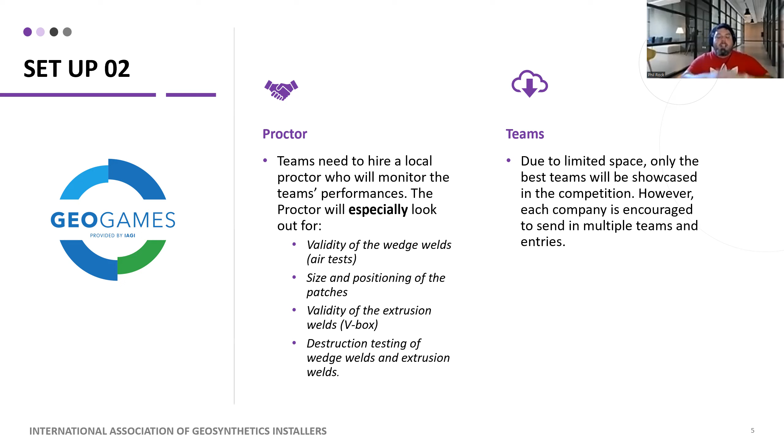So here is what you will have to weld. All players must be wearing proper PPE; a little more detail on this a little later. Prior to the start of wedge welding, the teams position their panels exactly as shown in the panel layout drawing that you see right there. They calibrate their machines, leave them on, and position them where they want inside the layout. So you calibrate your machine, you tweak everything, you put it in the layout.

At this time, teams are allowed to cut out the patches that will be required for the repairs as well. So you look at that layout, you pre-cut your patch, and you leave this on the layout. The timer hasn't started yet. You can see right there what we require for filming. So basically, we need the camera placed as shown in the drawing below.

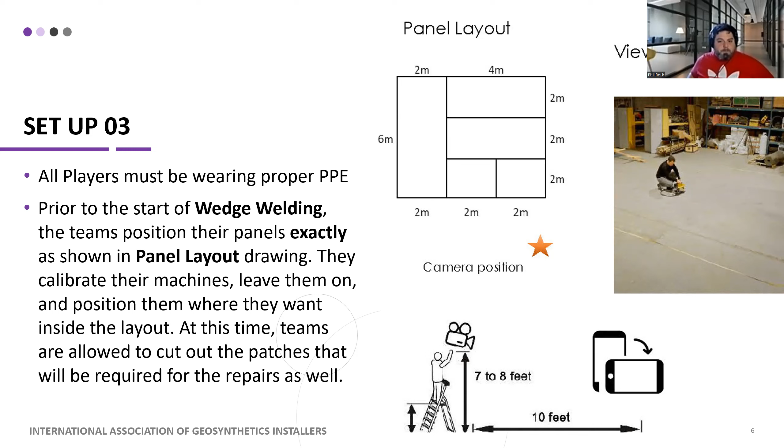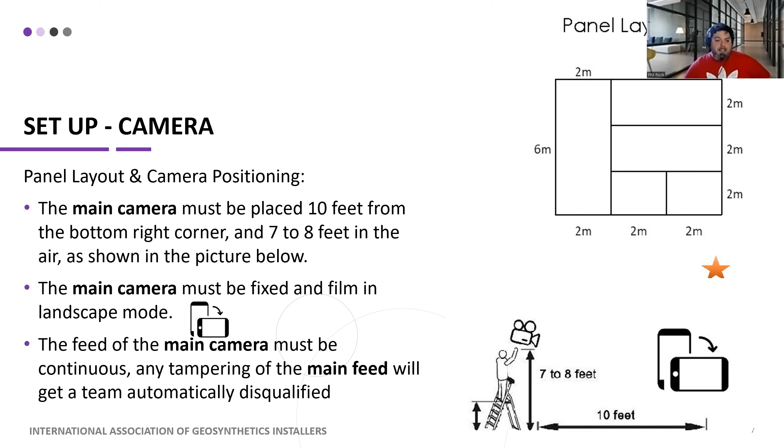The main camera must be placed 10 feet from the bottom right corner and 7 to 8 feet in the air as shown in the picture below. You can use your phone. The main camera must be fixed and film in landscape mode, and the feed of the main camera must be continuous. Any tampering of the main feed will get a team automatically disqualified.

Once ready, the players need to wait outside of the layout just beside the camera. The Proctor counts down 3, 2, 1 before the team can enter the layout, then starts the stopwatch once the team enters. Everything is prepared beforehand - patches are pre-cut, machines are calibrated. The team is outside the layout, the Proctor counts 3, 2, 1, boom, and the timer starts. The competition starts.

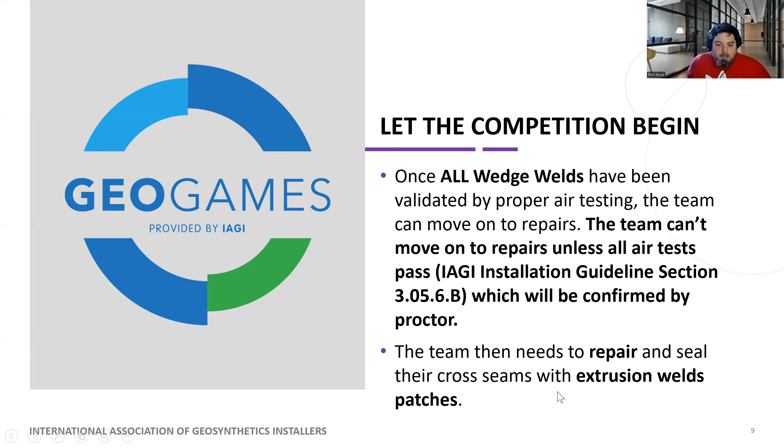Let the competition begin. Once all wedge welds have been validated by proper air testing, the team can move on to repairs. The team can't move on to repairs unless all air tests pass, which will be confirmed by the Proctor - this is very important. You cannot move on to repairs at all until all your air tests have been validated by the Proctor. A simple oral confirmation with the Proctor is sufficient - just make sure, like on the job site, you say 'Proctor, hey, 5 minutes' and then you take out your clamp. The team then needs to repair and seal their cross seams with extrusion weld patches.

Once all repairs have been achieved, the team needs to leave the layout. The Proctor then stops the chrono and conducts V-box testing on repairs and applies applicable penalties.

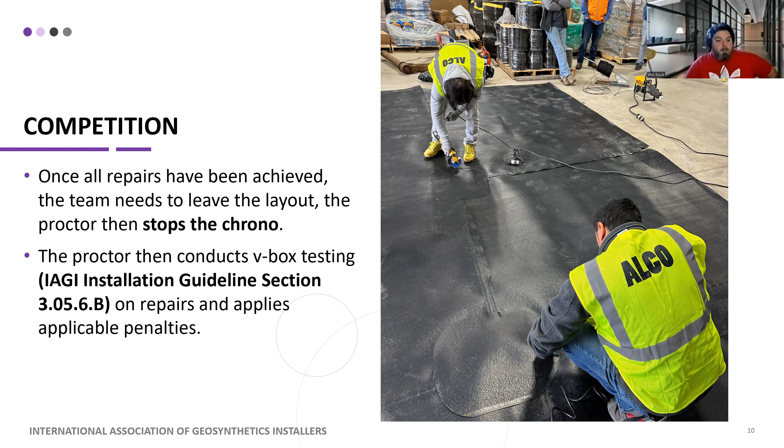Let's go into details. Any DT failure will result in automatic disqualification. After the chrono has been stopped, the Proctor will conduct DT testing on the wedge weld and one extrusion weld. If you fail any DT, you will be disqualified. Other than that, the team with the overall lowest time wins.

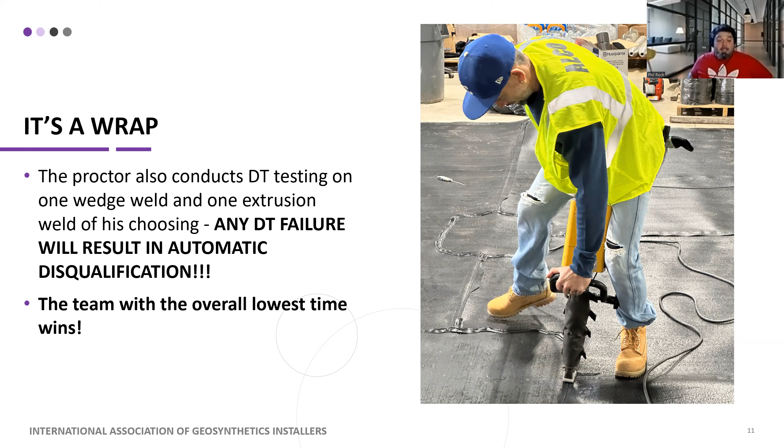But here's where it gets tricky, because penalties will be applied if you don't follow everything we discuss here. This is pretty much the main reason we're doing these videos - so that you understand exactly what you need to do and how you will be penalized if you don't follow this, which all trickles down from IAGI.

So, wedge weld and air tests. Channels must be filled with air to 30 to 35 psi and must not sustain more than a loss of 4 psi over the course of 5 minutes. Should a competitor remove clamps before 5 minutes, a penalty of the balance time - the difference between the time you take off the clamps and 5 minutes - plus 30 seconds will be added to that team's total. So you want to make sure your air tests are done for the adequate 5 minutes. IAGI understands that typically there needs to be time for the pressure to reach equilibrium, about 2 minutes, but for the purpose of the games, the 5 minutes will start as soon as the pressure has reached the desired PSI.

We do our homework, we read our IAGI. We know that usually you wait a little bit for equilibrium, but this little bit was hard to quantify. So basically, put your air in, give it a few seconds to calibrate, start your air test chrono. The 5 minutes will start as soon as the pressure has reached the desired psi.

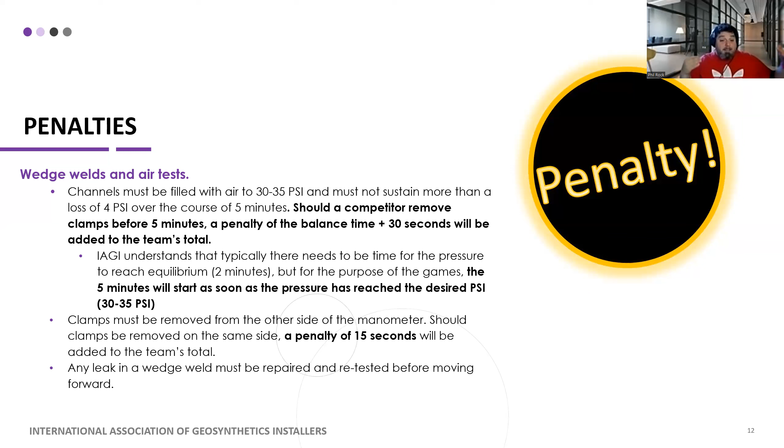Penalties on repairs: teams must have all their air tests validated by the proctor before moving on to repairs. Should a team start repairs before air tests are validated, the time between the start of repairs and validation will be added to that team's total, plus a penalty of 60 seconds. We know that on a real job site some guys do the air test while another starts repairing another weld, and that's normal. But for the sake of the competition we separate it into phases: all air tests must be validated by the proctor before you move on to repairs, otherwise we add the time difference plus 60 seconds.

Patches must extend at least 6 inches from the side of the defect as per IAGI procedure. Every patch that doesn't respect this criterion will add a 30 second penalty to that team's total. Your patches will be measured by the proctor and you must respect the correct size.

Once the team has finished all repairs and the chrono has been stopped, the proctor verifies all patches with a V-box. Leaks on any given patch will add a 60 second penalty. This is done after your timer has ended. Then the proctor will take some time to do a bunch of tests, including this V-box test on your repairs as well as destructive testing on your wedge welds.

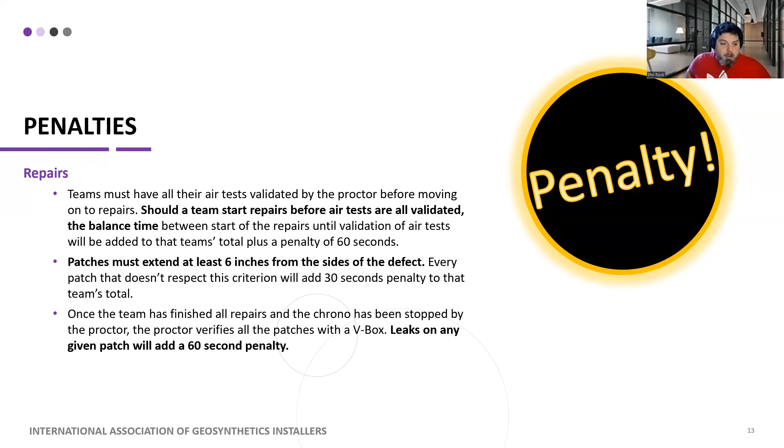Other types of penalties: GeoGames reserves the right to apply 30 second penalties for clear safety violations or quality violations that do not follow the IAGI installation guidelines. Examples include throwing a knife onto the liner, not wearing gloves, or not grinding before extrusion welding, etc.

Think of the job site. You're on the job site when you do this competition. You must be professional. We must showcase quality, safety, and overall good behavior on the liner.

With one exception this year, we're going to make the hard hat optional, and the reason is we want to showcase the guys' faces, and we understand that sometimes the hard hat can fall off. So we will waive the hard hat for this year - maybe it's the last year we do this though, so take advantage and do your hairdo.

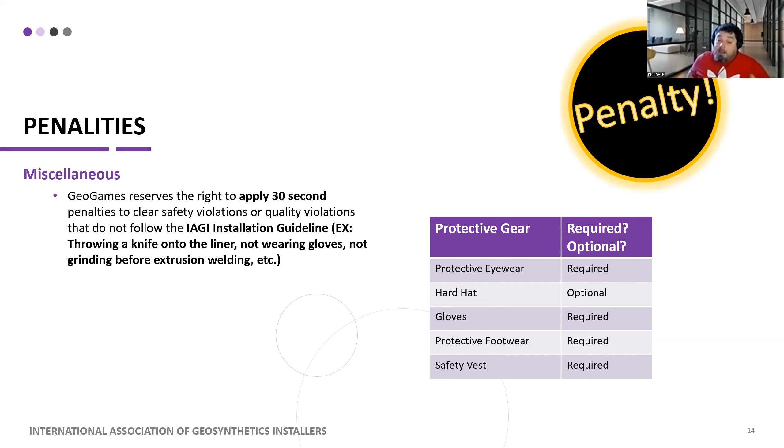Just kidding. Other than that, you will be required to have protective eyewear, gloves, protective footwear, and a safety vest. So your normal PPE - the hard hat you don't have to wear, but if you do, I personally will be very proud of you.

We encourage teams to have other feeds, other cameras. These can consist of other people filming with their phones, also in landscape mode please. So landscape, like this - we want like this. And the cameras can move around, zoom in and out, film close-ups, commentary, screaming. We want to see action, we want to see faces.

That means you do need your main feed, which is fixed and positioned at a certain distance from the layout, as explained earlier. But you can send us any amount of additional feeds just for us to make interesting instant replays, zoom in, zoom out. So you can have people filming, but they can't be on the layout. Please respect the competitors and the competition - everyone stays outside the layout, but go ahead, go crazy, go around the layout, zoom in, zoom out. That will just make better footage for the competition overall.

GeoGames was initiated to profile the fantastic work geosynthetics installers do every day in the field. Please use all proper safety measures, PPE, and professional installation methods when undertaking this competition. So basically what I just said, but in proper English - we want our installers to shine on the world stage. Yep, that is the main goal of GeoGames.